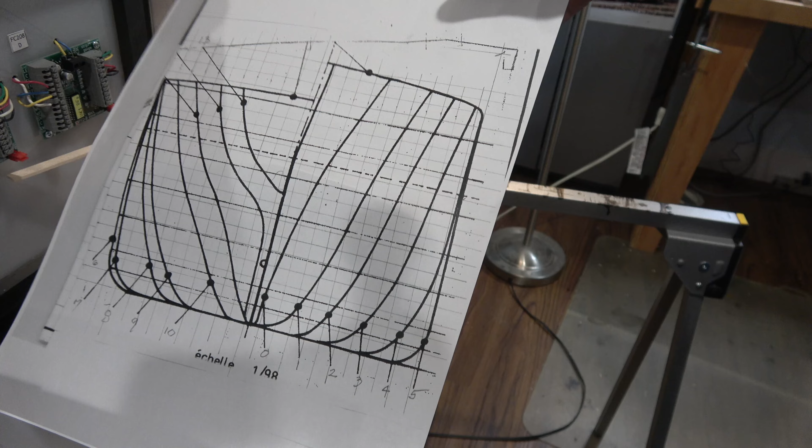All but one of these are the formers out of the drawing that you saw before. A little crowded here. These are the lines for the ship hull. It's a way to make a drawing of a three-dimensional object in 2 dimensions. This is the front half, this is the back half. And

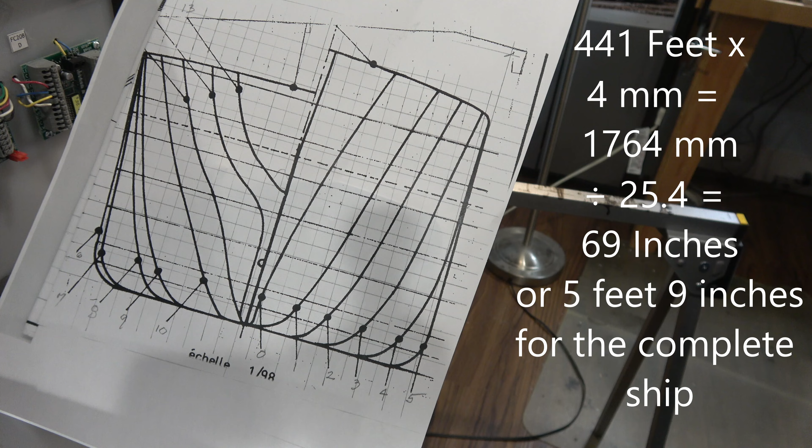the drawing was at some odd scale, but I was able to convert, and I had this blown up to exactly the scale that I want to work in. This is full scale for me. Not 1:1, but it's 1:76.2. It's 00 scale. So it's 4 millimeters to the foot. It seems rather large, but ships are large. So if you've ever seen one up close, you know what I'm talking about. I'm talking big ships, full-size World War II and forward ships. They were getting pretty big by World War II.

So at various planes through the hull, this is the line that defines the shape. And of course it's repeated on the other side, but you can fold it over and do both sides. And that's what I did. And that's how I cut out these formers, shape formers. Now you notice, well, you can't see it. Let me swing down here. You see this is quite a bit shorter than this because that's the way it is. The deck is much lower in the back than it is in the front.

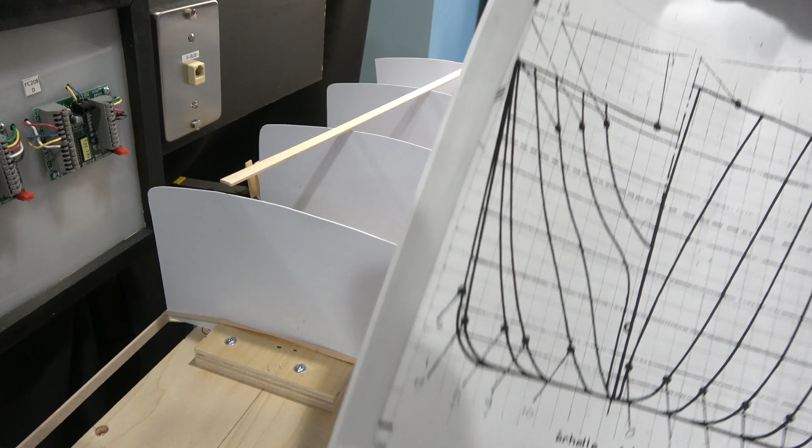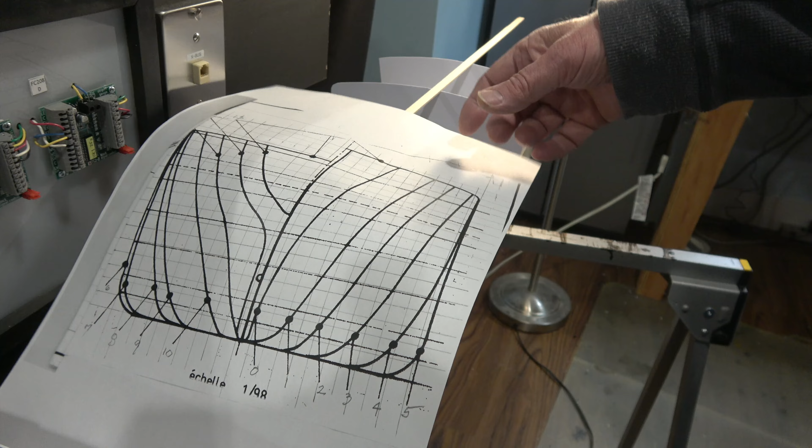The front is higher to shed the waves of the Atlantic going across, and it's slightly rounded over here. There'll be a row of stanchions along the side, of course, but that allows the water to shed, the green water coming over the bow, if there is any. And there probably would be at times, certainly. And you have to design a ship to prepare for those times. So

I cut out the various formers, plus I added one that was not drawn. There was quite a bit of space between this former at Station 4, I believe it is. Yeah, Station 4 and Station 5. There was quite a lot of space. So halfway between them, I created another one that was not drawn on the drawing, and I did it with a joggle stick. So I feel like my formers have a fairly good representation, and I may need to sand them down a little bit, or maybe even add a little on to some of them to get them forming up the shape of the hull exactly the way I want it.

But that's okay. No one is ever going to see these once the model is done, because I'm not going to model the interior of the ship. I may have some places where you can peek in and see a little of it for one reason or another. Maybe I'll have a light on inside something, but for the most part, you're only going to see the outside of this ship. So that's where I am.

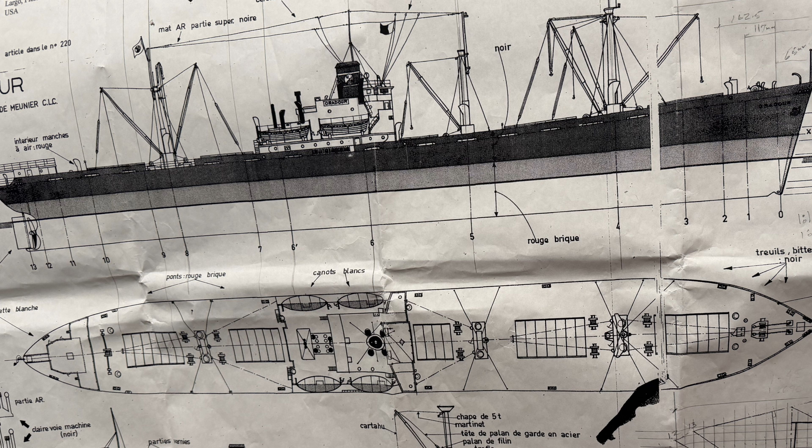Chines and framing between these formers are going to go in, top, bottom, and several in the middle, and across the top to support the deck, support the deck house, because the deck house sits right here. It's just behind this raised portion. There is a crane. I'm not sure. I think the crane is about right here, the forward crane. There might be two of them, actually. Two forward cranes. One shortly in front of the deck house and one on up to service the two holds in the front. And there's one hold behind and one crane back there.

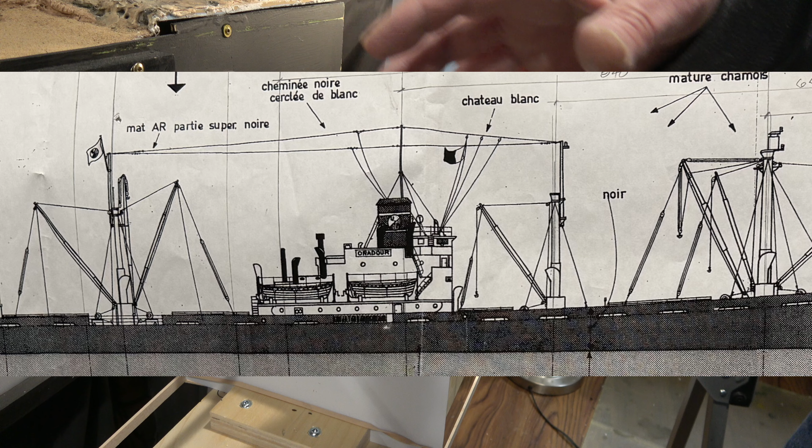And I'm going to pick up the cranes, the two cranes in front and one crane in back, and the deck house. So that, and the funnel, of course, so that I'll have that to see as kind of a silhouette from the side and from various views around the layout when I'm shooting trains. I think it'll be really exciting to have it. I've wanted it since the very beginning, as I've mentioned before, and I'm going to get it. I'm going to do it. Depending on how this goes, I might build another one. Who knows? We'll see. So that's where I am at the moment.